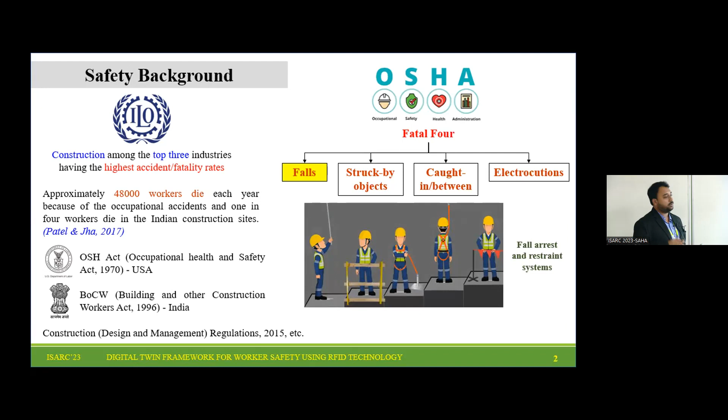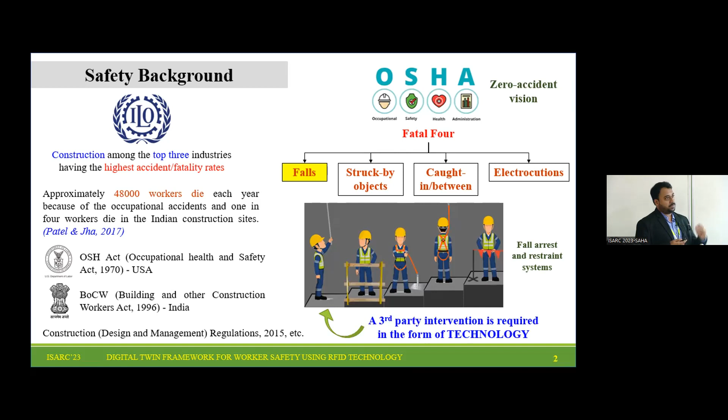And the zero accident vision as per OSHA has not yet been reached at almost all sites. So we are proposing a third-party intervention in the form of technology, which can guide or be implemented at site through RFID, to bring down the rate of accidents due to falls.

In technology, Construction 4.0 is going on, that is known to all, and there are many technologies like big data, AR, VR - terms we are familiar with. In this study, we are using RFID and digital twin techniques, and for data acquisition, data display, and further analytics, we are using BIM.

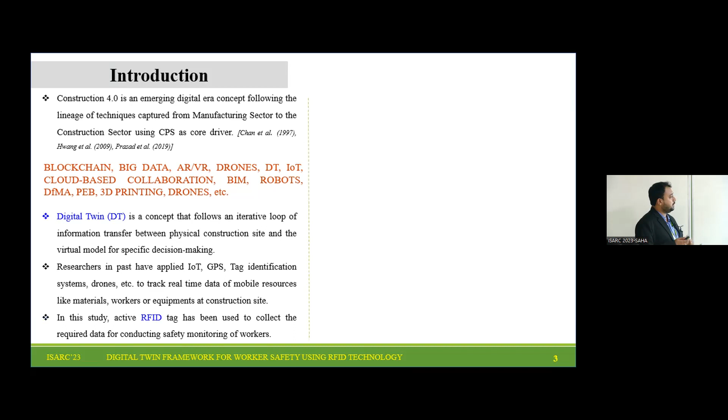Digital twin is a concept, as we all know, that is an iterative loop between the physical construction site that we have, and we make a digital technology twin of the same thing, which will be effective for various analyses and specific decision making, which will be implemented at site.

Researchers in the past have applied all these techniques - not all, but we are using only the RFID and digital twin techniques for worker safety specifically, from falls and overhead works.

So this picture just shows the digital twin concept at a time. The actual construction site will provide the data, and whatever specific decision making we do will be converted back into actions at the site.

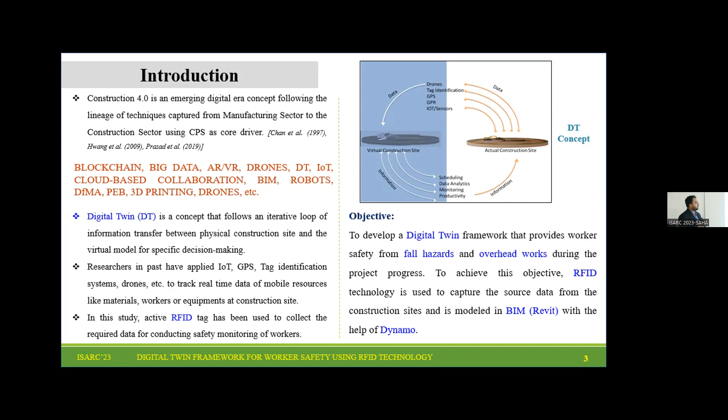As an objective, we have to develop the digital twin framework for fall hazards and overhead works only - the scope is limited. To achieve this objective, we are using RFID technology to capture the source data of the location of materials, equipment, and workers, which will be modeled in BIM, and then specific analysis using backend coding will be done, with further analysis reflected at the site through the mobile application.

So this is the proposed digital framework: we have the actual construction site, we will be enabling the major assets - selecting some assets such as equipment, workers, and some materials - and enabling them with active RFID. Then we will be placing sensors at particular predefined locations to gather the data of those tagged assets.

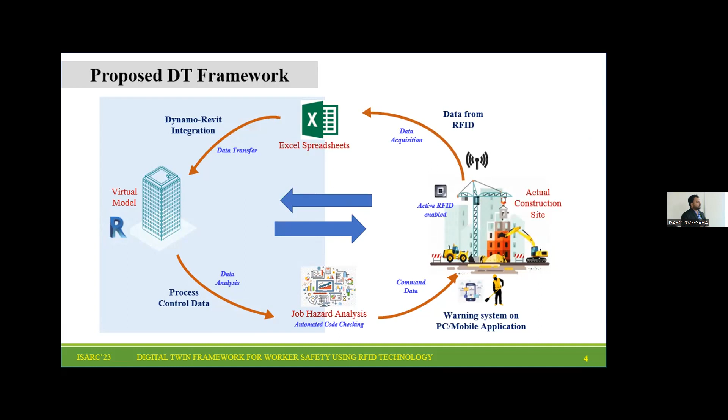And then we'll be transferring it to Excel spreadsheets, and from there we can transfer it to the virtual model through the Dynamo plugin in Revit. Further analysis will be done in the form of automated code checking - for Revit we can use Synchro and similar tools, and we have used Python here normally. Finally, whatever notifications we generate can be sent directly to the concerned workers who are in an unsafe zone, directly at site through the mobile application.

So these are some of the steps that have been converted: first we'll select a site, identify the major resources to be tracked, then store the location in an Excel spreadsheet, and represent the various resources in the Revit model that we will be making for the actual site through Dynamo.

Dynamo will be used for two things: the location and differentiating the type of resources that we represent in the Revit model. Then we can reload and refresh the model to obtain real-time data of the location. The proximity, whatever hazard the worker is in, will be checked against various codal regulations, and in case of non-compliance, notification can be sent directly to the workers under the hazard zone.

So for a simple case study we have taken a building, a room or something. We have taken three resources here, just two materials and one worker. This Excel shows the location at any particular given point in time, which will be shown in the next slide.

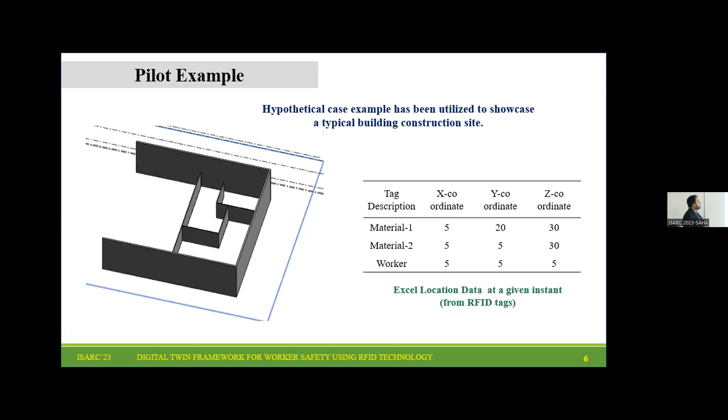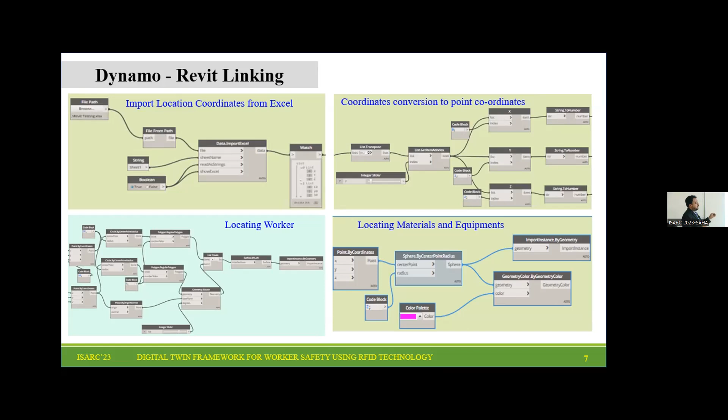So for converting that Excel location into the Revit model, Dynamo has been used for only four things: importing the location from the Excel, coordinate conversion into point coordinate systems, separating the materials and equipment and workers as two different assets, and then displaying and locating them into the Revit model using Dynamo.

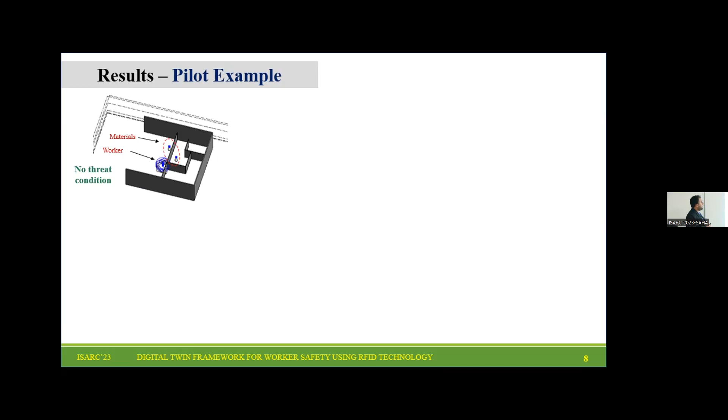In this first case, as you can see, the worker and materials are there, but they are far away from each other, so there is no fall hazard as such. In this case there is no threat condition, but there may be a condition where the worker is idle, and one can check for productivity in such a scenario.

This is one of the cases from the Excel shown earlier, which we have imported here. Here material 2 is posing a threat of fall, as it is directly above the worker, so the worker is under the fall hazard of material 2.

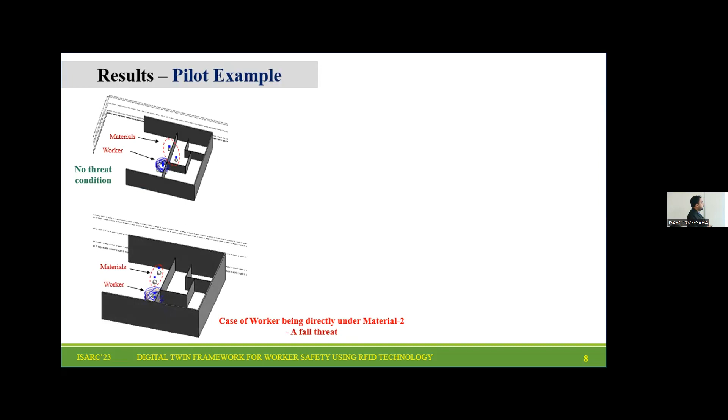Coding has been done to detect the materials in the vicinity of the area from their tagged locations, and we create a safety bubble. If anything is inside the safety bubble, it will pose a notification saying you need to move ahead this much, whatever is the safety regulation followed inside.

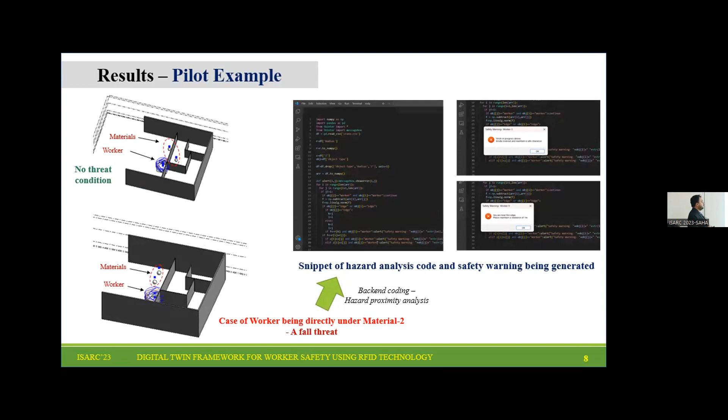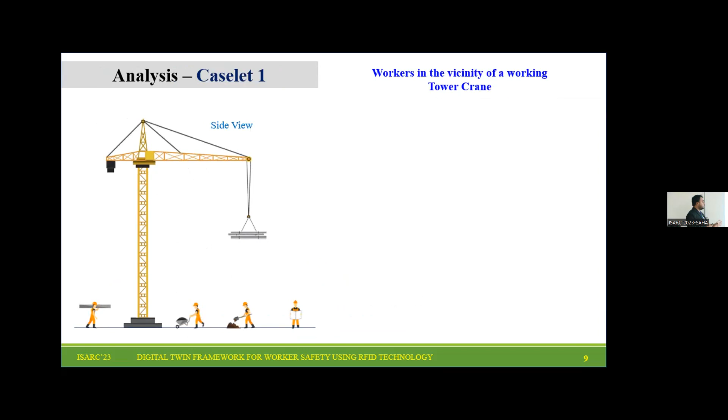We have further tested it using two case studies. Like a crane is there, workers are working below it, so it is a fall hazard if the workers are within the safety circle of the crane, posing a fall hazard.

In this case, only the 3 workers who are within the crane swing radius will be sent a notification on their mobile application, and the 4th worker who is outside but nearby, in the safe zone, won't be sent a notification. So we are trying to eliminate any false concerns, like false positive conditions, in this case.

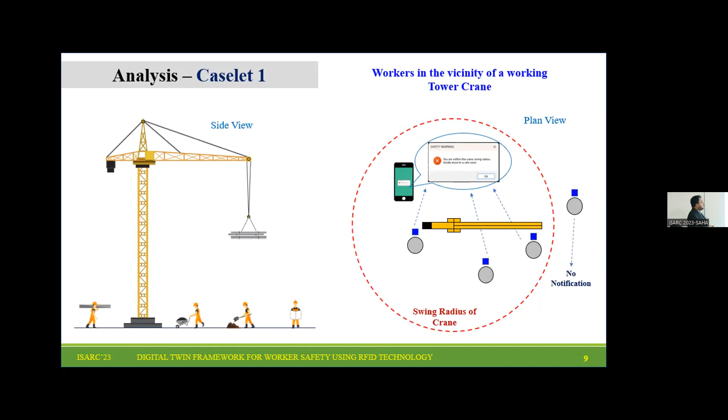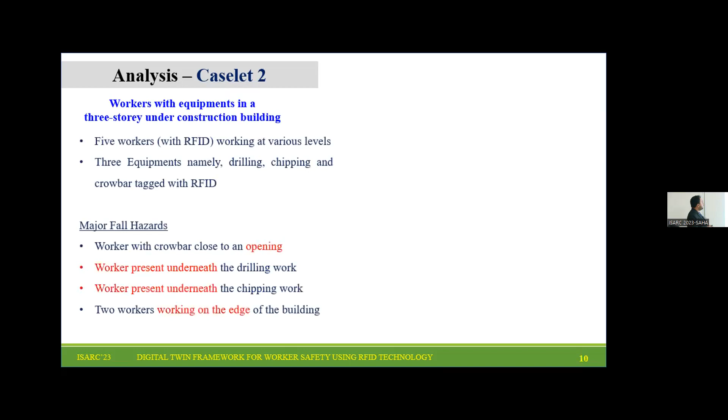As a second case, we have taken an under-construction building, and imposed some threats into the model for the framework implementation. As you can see, there is an opening, workers are working on the edges, and workers are working above each other across the edges. All these are fall threats, different types of threats taken into this application.

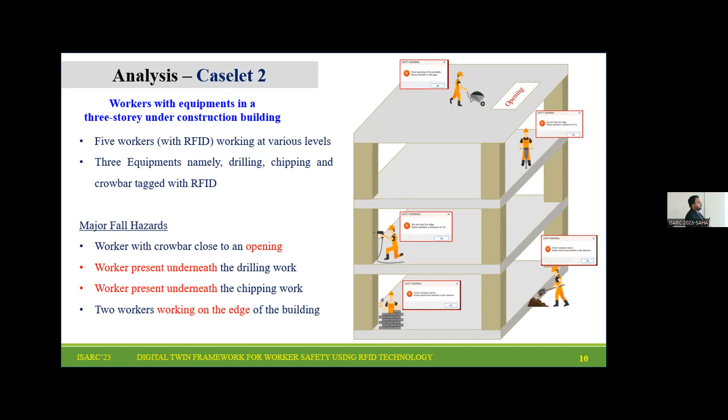All this has been taken for the analysis part, but we have not yet tested it on a real construction site. That is one of the things we are taking up as part of this.

In this study, Dynamo scripting has been used, and the integration of this will provide seamless data transfer from the actual site to the virtual model. This can be expected to locate everything from the site, and safety can be monitored round the clock.

Although the framework has proved effective for the hypothetical studies, validation still needs to be done on an actual construction site for it to be proved essential.

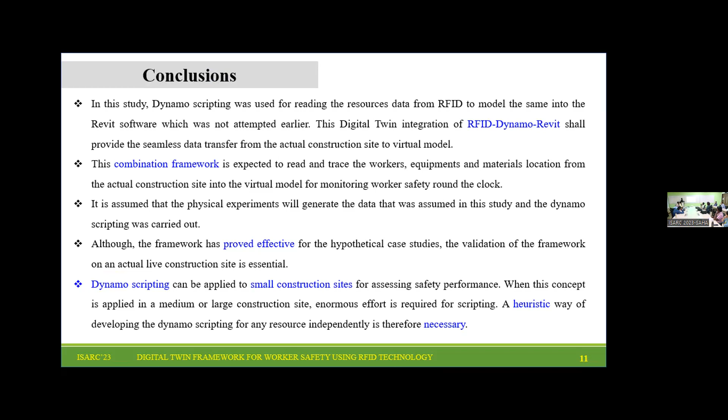Dynamo scripting has been seen to be applied on a small construction site for worker safety, but even for this we had to do too much scripting for just 3 workers or 5 workers or 8 or 9 resources. So on a large scale project, heuristics will definitely have to be developed for the scripting part alone.